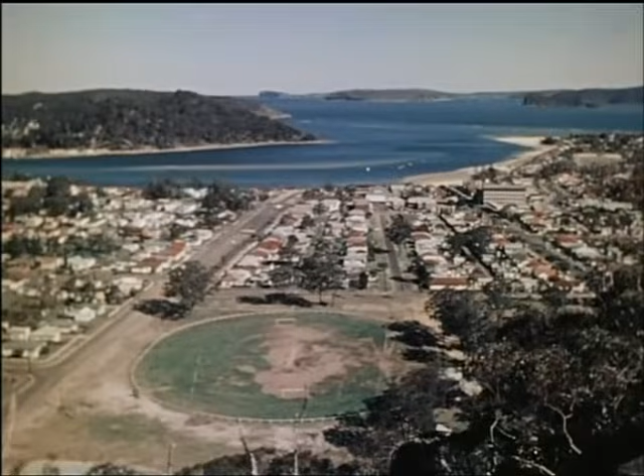With the increasing development of this part of the central coast of New South Wales, a bridge was required to provide a link between the relatively isolated eastern side of Brisbane Water and the rail and road facilities of the western side. The site selected is known as the Rip, where the waters narrow to a channel about 200 meters wide. The narrowness of the channel creates high flows of water with the movement of the tides.

Because of these rapid currents, the construction of the bridge foundations in the form of piers in the channel was undesirable. It was decided to construct an arch-shaped bridge of very high-strength pre-stressed concrete, cantilevered across the channel to avoid the need for permanent piers or temporary supports in the strong tidal flow.

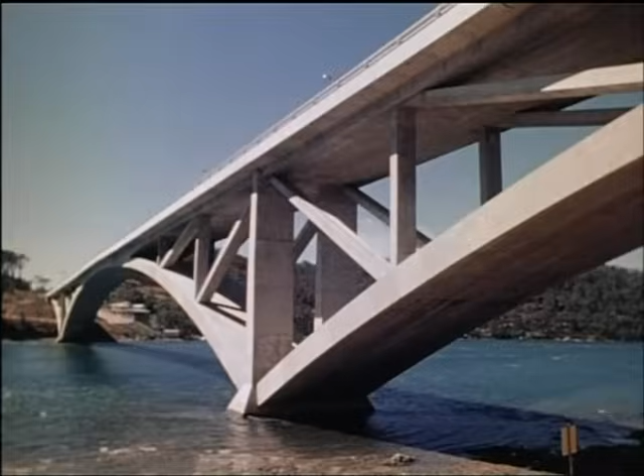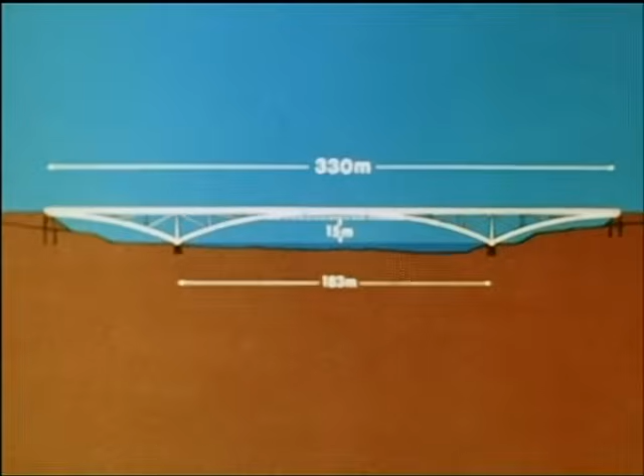The bridge comprises 2 cantilever trusses, each 147 meters long, and a central suspended span 36 meters long. The overall length of the bridge is 330 meters, with a main span of 183 meters and a vertical navigational clearance of 15 meters over a width of 70 meters. Each cantilever truss is supported on a pier, which is founded on bored piles in shallow water close to the shore and anchored to an abutment, which is also founded on bored piles.

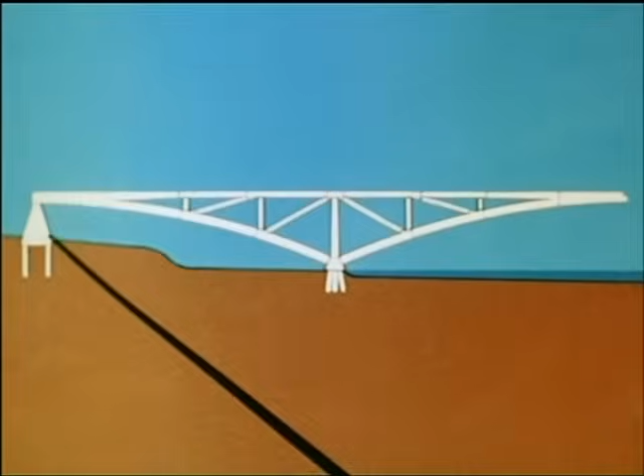A cantilever truss comprises 8 panels and many members, mostly precast and pre-stressed. In the 2nd to 7th panels, the bottom chord or arch rib and the top chord or deck are separated by columns and diagonal ties. The 1st and 8th panels are constructed of pre-stressed concrete girders of variable depth.

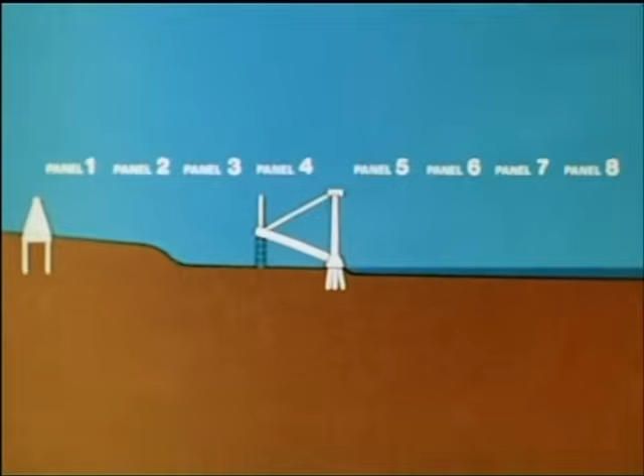With the abutment and pier complete, construction of a cantilever truss was commenced with the erection of the arch rib members of panel 4, one end being supported on a falsework tower. The first diagonal ties were constructed and 2 precast columns were erected. The panel was completed with the erection of the deck members, placing in situ concrete and pre-stressing. Similarly, panel 3 was constructed.

Cantilever construction of panel 5 over the water followed, and pre-stress was applied. The weight of the overhanging panel was balanced by the panels previously constructed on the shore. Construction continued progressively, the shore span being always in advance of the span over the water, so that there was always enough weight in the shore span to more than balance the weight of the construction being cantilevered over the water. The shore span was anchored at the abutment, the temporary supports were removed, and the addition of panel 8 completed the construction of the cantilever truss.

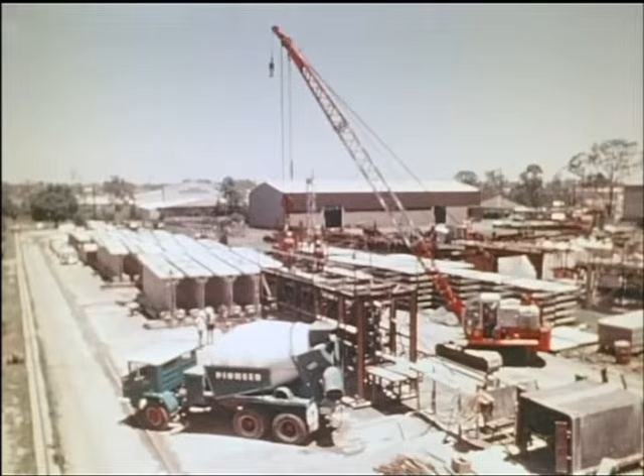In September 1971, a contract for construction was awarded to John Holland Constructions Proprietary Limited. The many precast members for the bridge were manufactured at their casting yard in Seven Hills and at the EPM factory in Blacktown. Each of the precast members incorporated bearings, stressing anchorages and ducts. The largest of these were for the arch ribs and weighed over 50 tons.

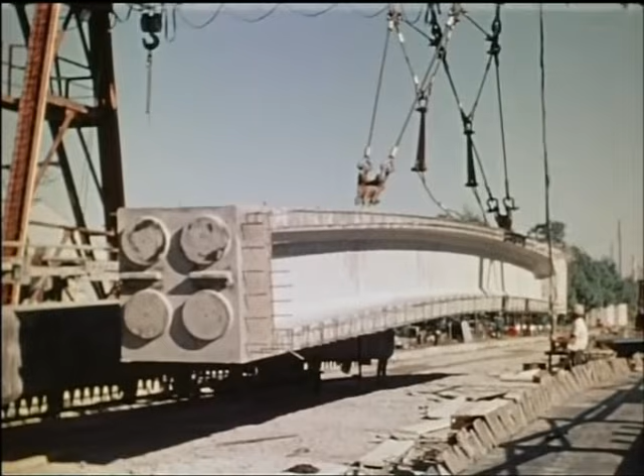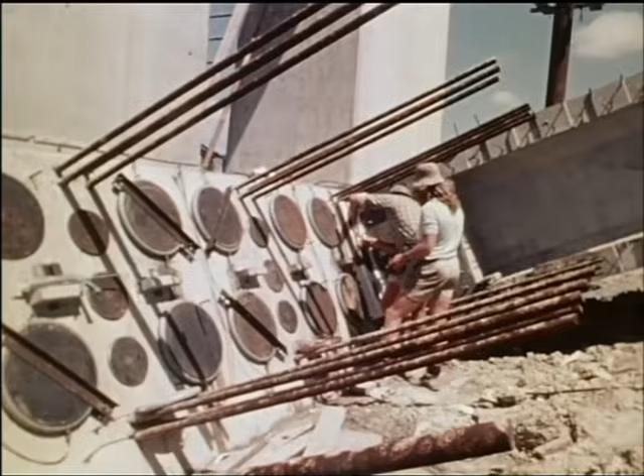At the bridge site, the main pier was constructed. The base of the pier incorporated temporary bearings and a battery of Freyssinet flat jacks to support the lower end of the arch rib members. The flat jacks were partially inflated with oil and together with the temporary bearings would provide hinges for rotation of the arch rib members during construction.

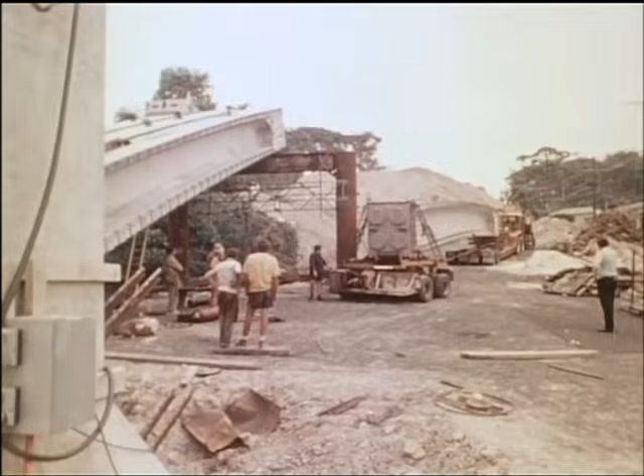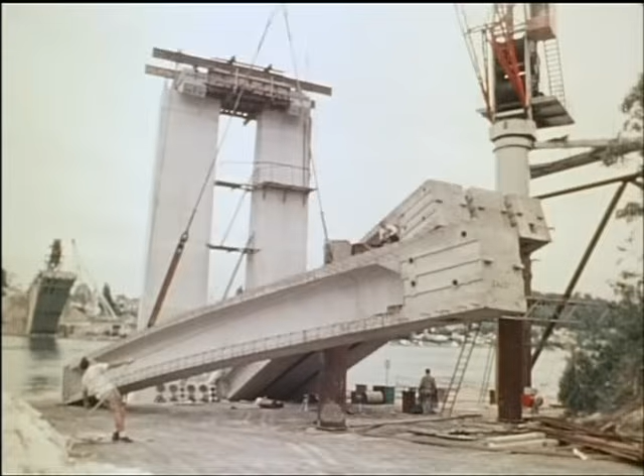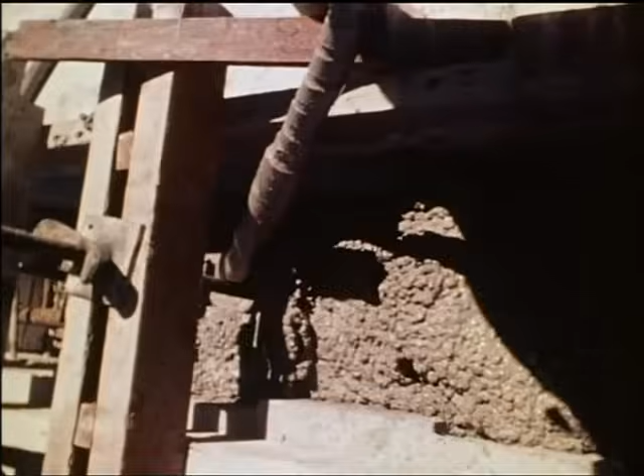The arch rib members were transported by road to the bridge site. A powerful crane positioned each arch rib member with its lower end bearing on the base of the pier. The upper end of each member was supported on a falsework tower. Concrete was cast between the ends of the 5 precast members, joining them together to form a cross girder. High tensile steel cable was inserted in the ducts and pre-stress was applied.

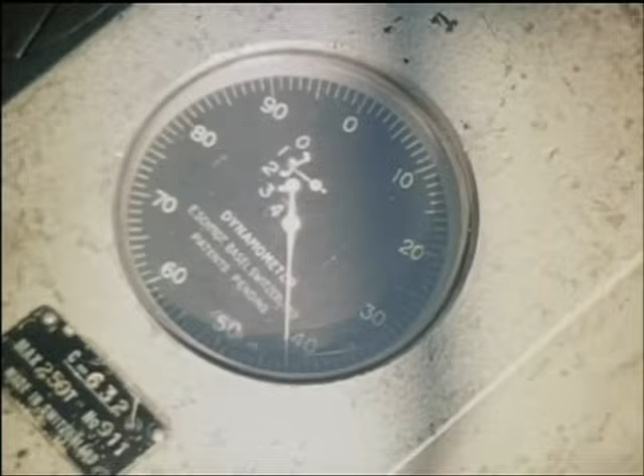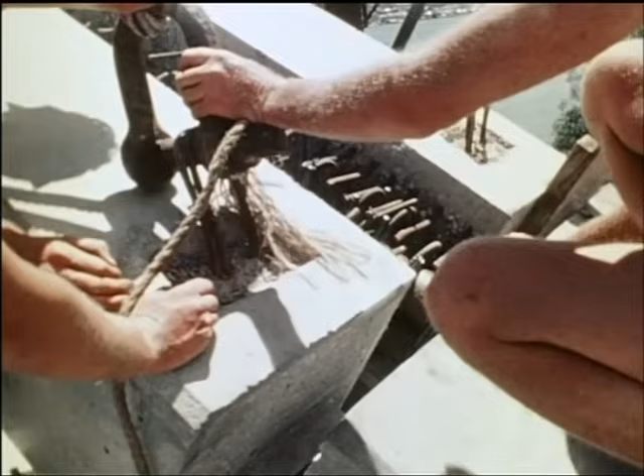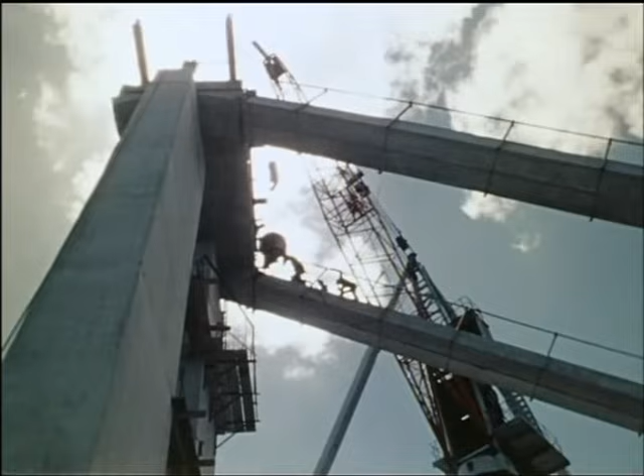Two diagonal ties were then erected. Each tie member was cast in 2 halves, each of which was supported on erection bearings. Pre-stressing ducts were installed between the 2 halves. Cables were inserted, concrete poured, and pre-stress was applied. The end of the arch rib was now effectively tied to the top of the main pier. Concrete was placed between the flanges of the arch rib members, so combining them into a single cellular rib.

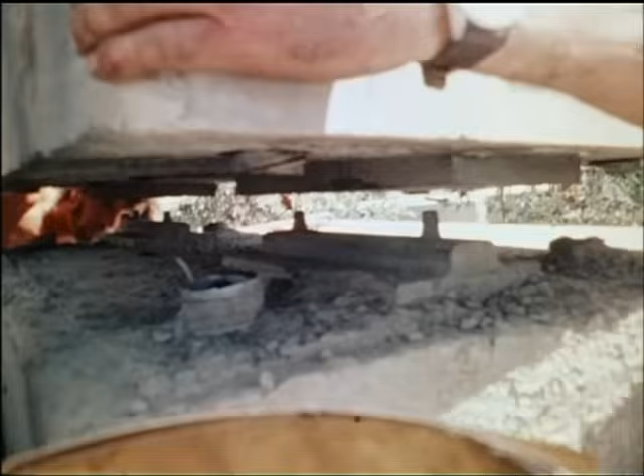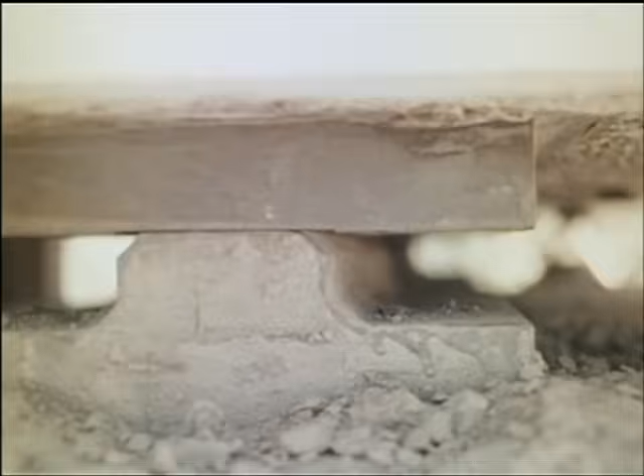2 precast columns were erected and temporarily supported by strutting from the ties. The columns, like the arch ribs, were seated on temporary bearings. All temporary bearings were left unconcreted to permit hinge action during construction. The erection of pre-stressed concrete deck beams followed. These incorporated longitudinal ducts in which cables would be inserted to progressively pre-stress the whole deck. The deck beams, like the other members, were seated on temporary bearings.

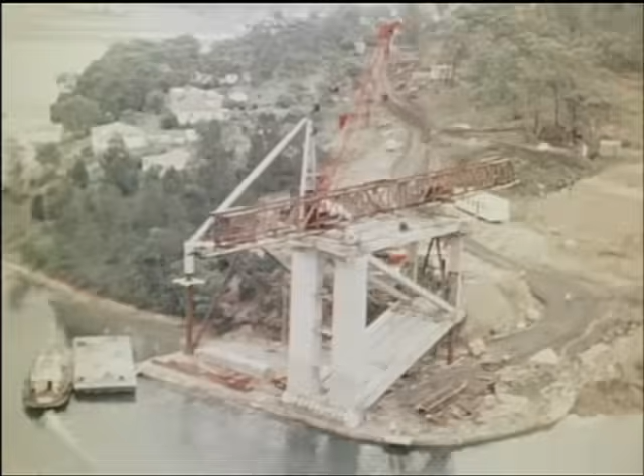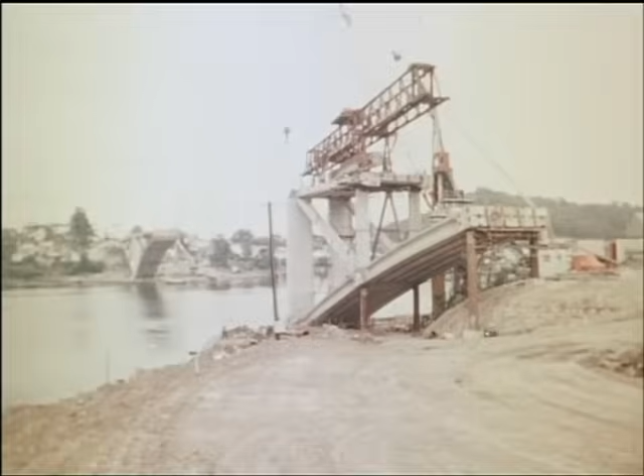5 deck beams were erected in this way. After placing of in situ concrete and pre-stressing transversely, longitudinal stressing tied the completed deck back to the pier headstock. A specially designed erection truss was mounted on top of the completed panel. Construction of the adjoining panels then proceeded. The erection truss now played the major role in handling and positioning the heavy precast members.

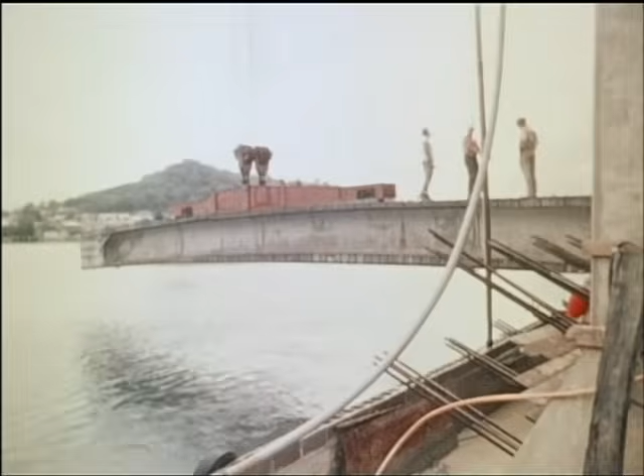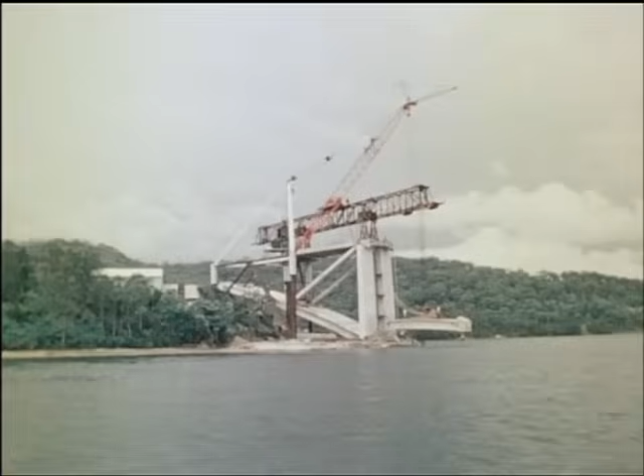Cantilever construction over the water commenced with the erection of the arch rib members of panel 5. Pre-stressing cables for the diagonal tie were anchored to the outer end of the arch rib member. The shore end was supported on the temporary bearing and flat jacks at the base of the pier. The outer end was supported by the pre-stressing cables from the pier headstock.

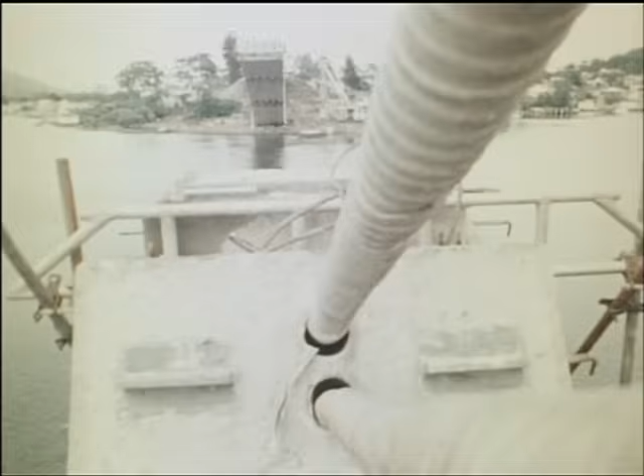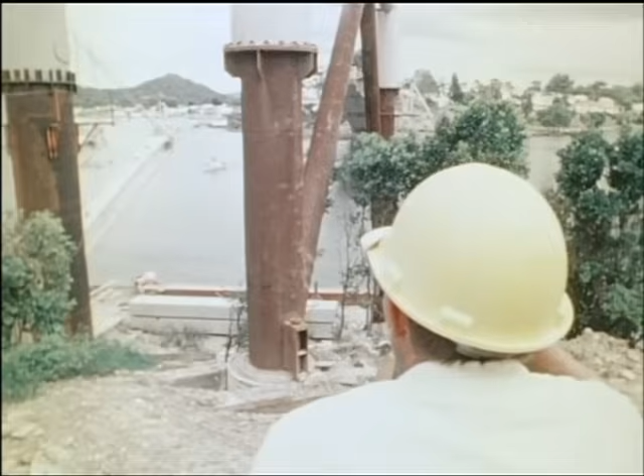The calculated deflection behavior of the cantilever truss during the course of construction was allowed for in the determining of all temporary erection levels. The external arch rib members were fitted with a temporary headstock. This temporary headstock supported the outer end of the remaining arch rib members.

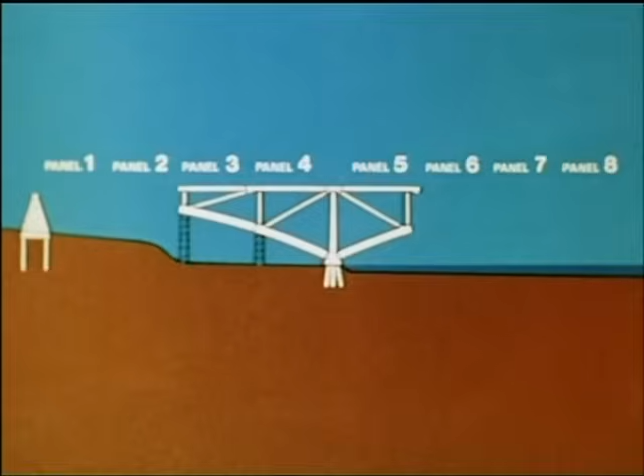Construction of panel 5 continued and was more than balanced by the completion of panel 3. A further stage of pre-stressing through the deck tied the completed panels together. As construction of the cantilever truss progressed, additional stages of pre-stressing the deck were required to counteract the increasing loads on either end.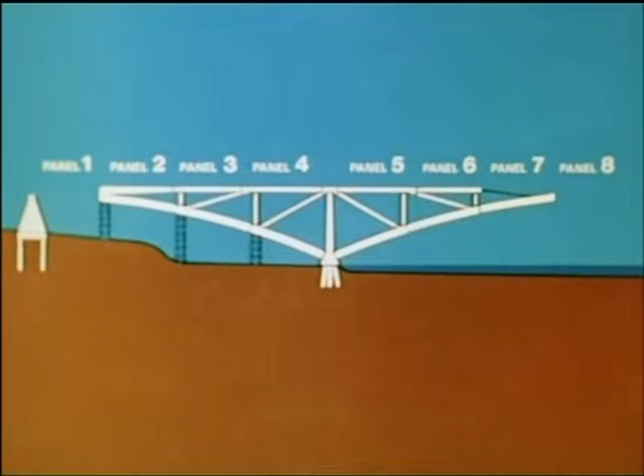In panel 7, the arch rib members were suspended individually by temporary cables positioned to allow for the casting of a massive cross girder extending upwards to deck level. This cross girder and an identical cross girder in panel 2 served as anchor blocks for longitudinal pre-stressing and also tied the arch rib and deck together.

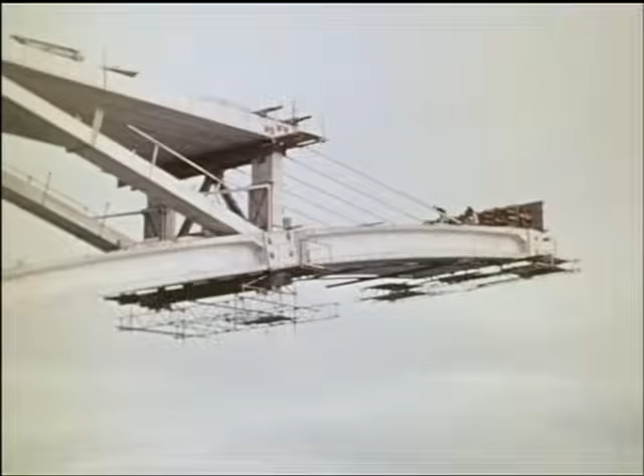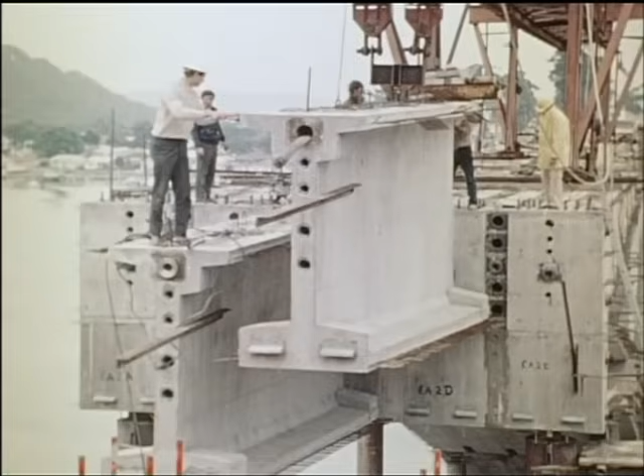Meanwhile, the truss was positioning the precast girder segments for panel 1. The first segments projected halfway between panel 2 and the abutment and were seated on erection bearings at their bases. An upper cable was used to hold each segment in position against the anchor block in the end of panel 2.

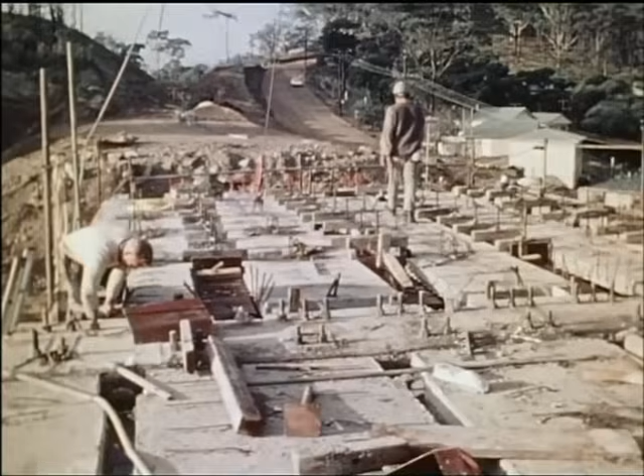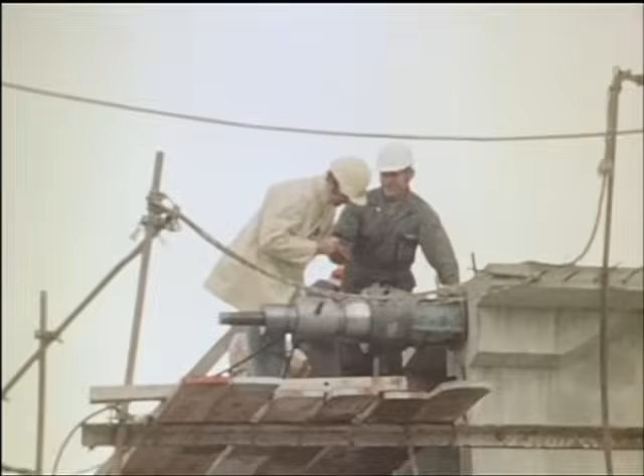With the segments for the first part of panel 1 in place, formwork was erected for the joints between the flanges and the transverse joint with panel 2. After concreting, this part of panel 1 was pre-stressed. The newly constructed cross girder at the end of panel 7 was pre-stressed transversely with cables. It was also stressed vertically with high tensile steel bars, thus providing anchorage to the arch rib.

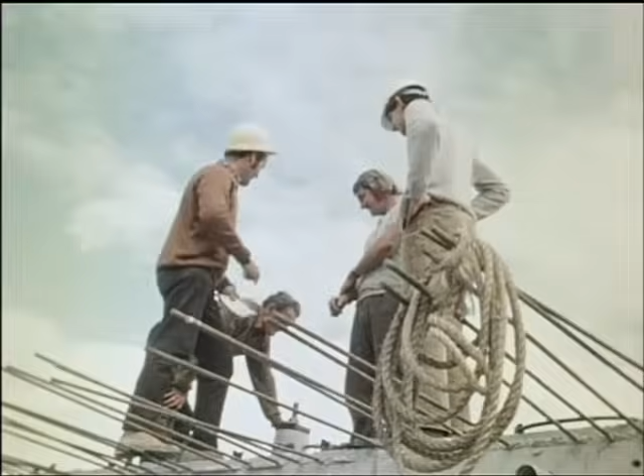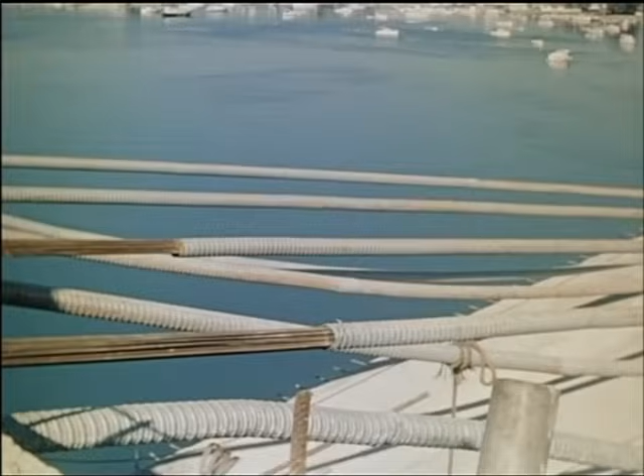The cross girder was then ready to provide anchorage for the cables which would permanently support the panel 7 arch rib. The 5 temporary cables supporting the arch rib were augmented by 4 cables anchored to the top section of the cross girder. These were stressed to share the load with the 5 temporary cables.

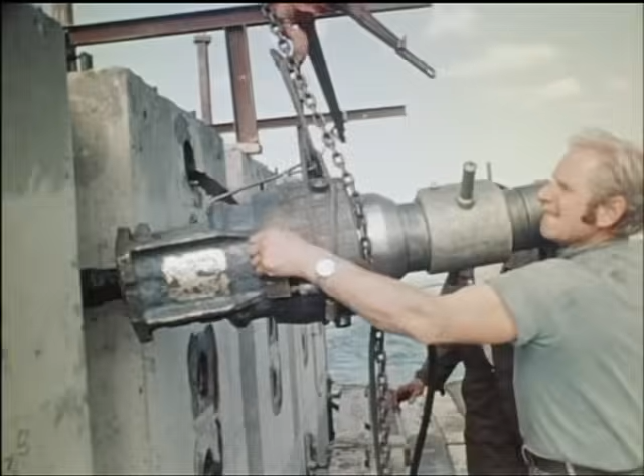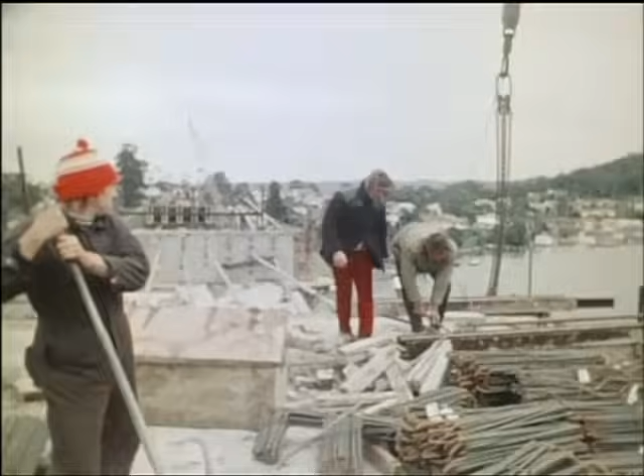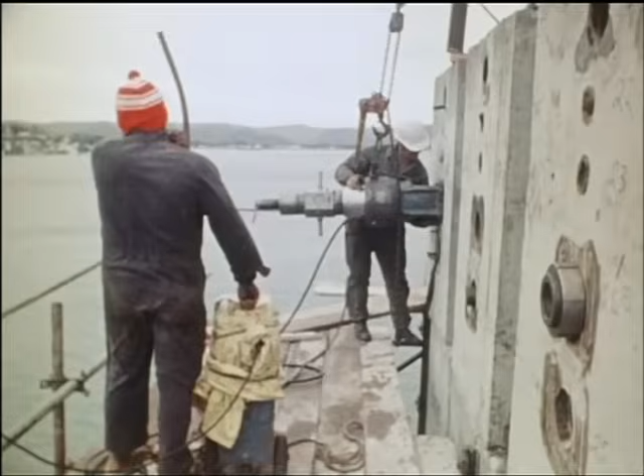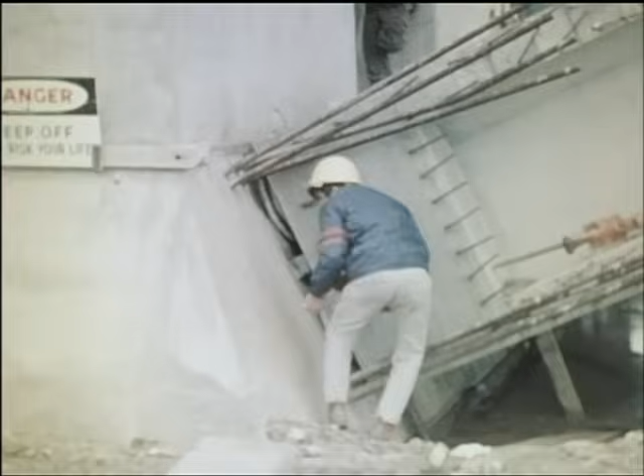The deck levels were checked at key points along the cantilever truss. Observed discrepancies between actual and predicted levels were then corrected. This was achieved by the operation of the flat jacks in the open temporary joints at the pier base and at the ends of the arch rib members. At each joint, in turn, the flat jacks were connected in 2 hydraulic circuits. Oil was pumped in to inflate the jacks and open the joint.

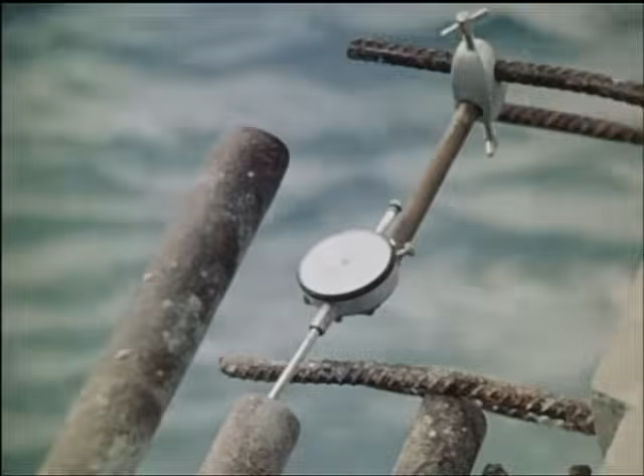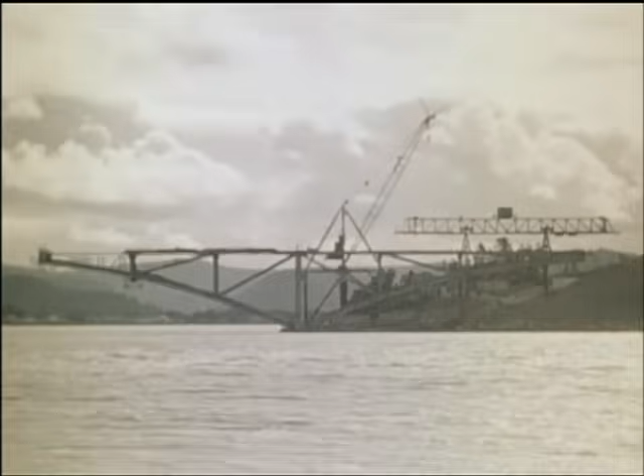Correction to the shape of the whole structure was made possible by the hinge action of these joints and the other temporary joints in the deck and columns. This operation had the effect of raising the cantilever so that each key point was brought to the desired level. Subsequent deflection behavior of the cantilever truss was sufficiently predictable for the temporary hinge joints in the arch and deck to be fixed. Oil in the jacks was progressively displaced by grout and the joints concreted.

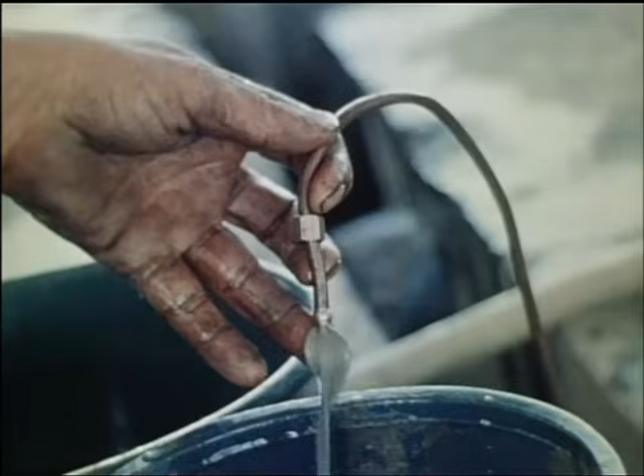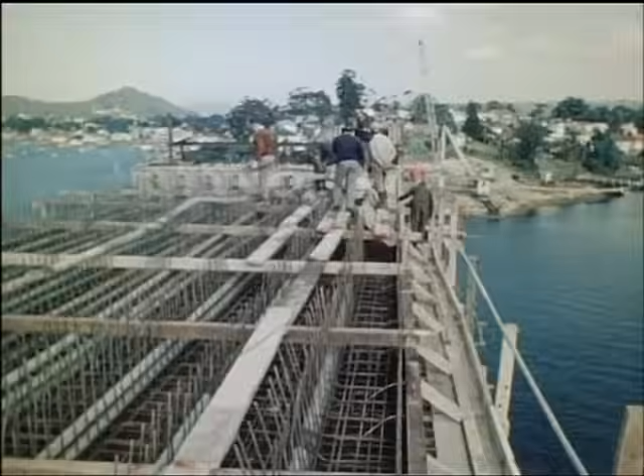Panel 1 was then completed by the erection of the remaining segments. These segments reached to the abutment, and after aligning, joints were concreted and the whole panel was pre-stressed back to the cross girder in panel 2. In panel 7, the deck was concreted in situ. The bottom slab was constructed first, and the ribs and top slab were formed using polystyrene void forms. Concrete was pumped from the shore.

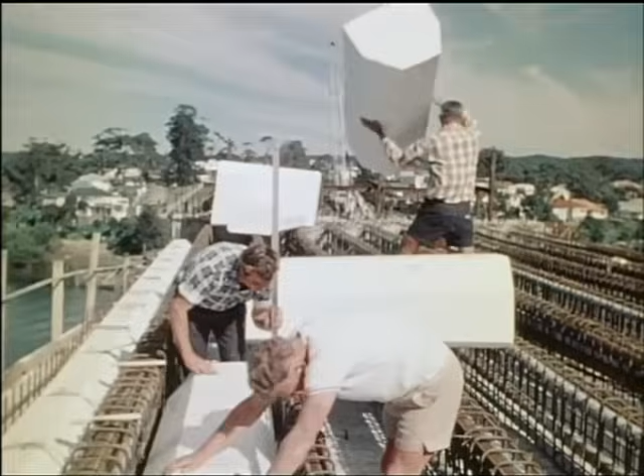Additional cables were threaded through the length of the deck from panel 1 to panel 7 and stressed. Also, the cantilever truss was anchored at the falsework towers near the abutment. Free cantilever construction of panel 8 could then proceed with safety. This was attached in 2 parts in a manner similar to the construction of panel 1.

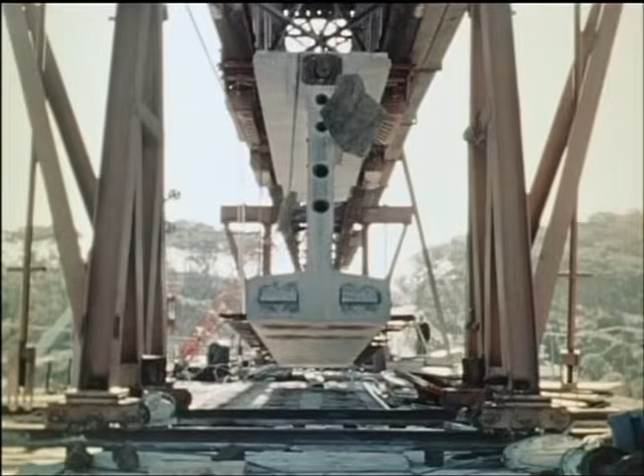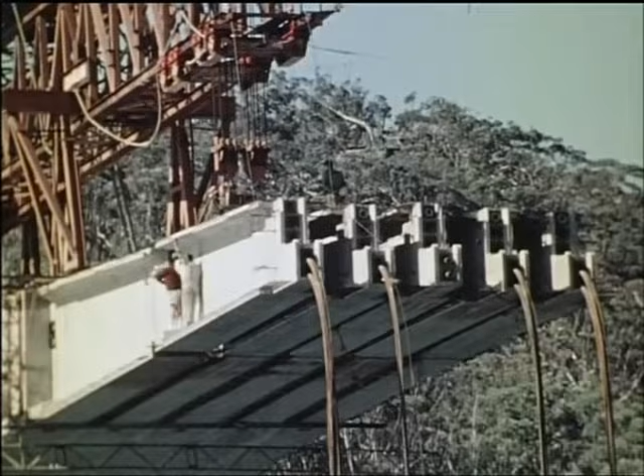With the completion of panel 8, the stage was approaching when this cantilever truss would be linked with the one constructed on the other shore by the insertion of the suspended span. Preceding this final major operation, fascia panels would attach to the arch rib. Cantilever panels were added and incorporated in the deck by the placement of concrete.

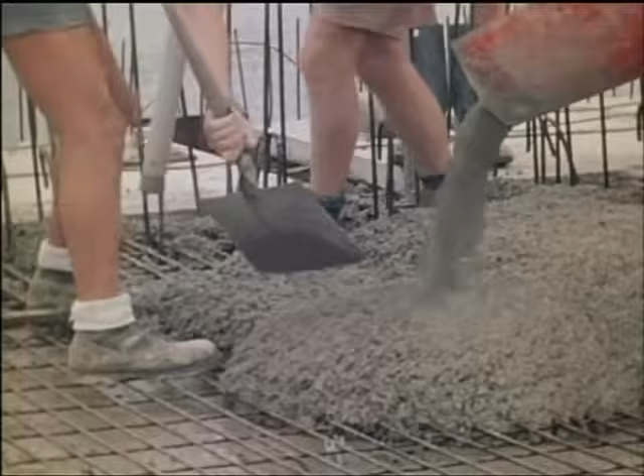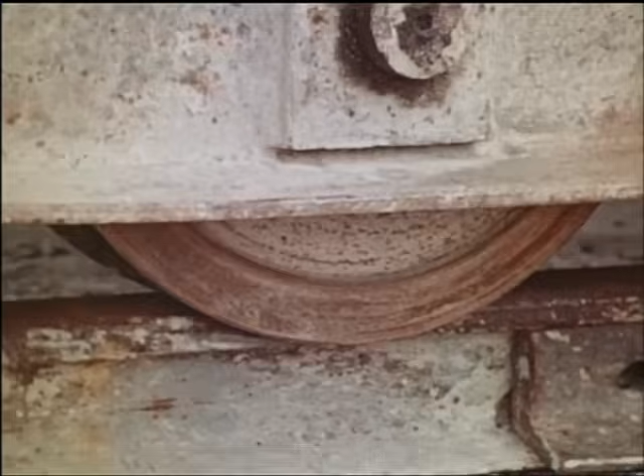Meanwhile, the erection truss was launched to bridge the remaining gap in preparation for the erection of the suspended span. For the launching operation, it was necessary to counterweight the partially dismantled truss and to provide a needle beam to receive it on the far side.

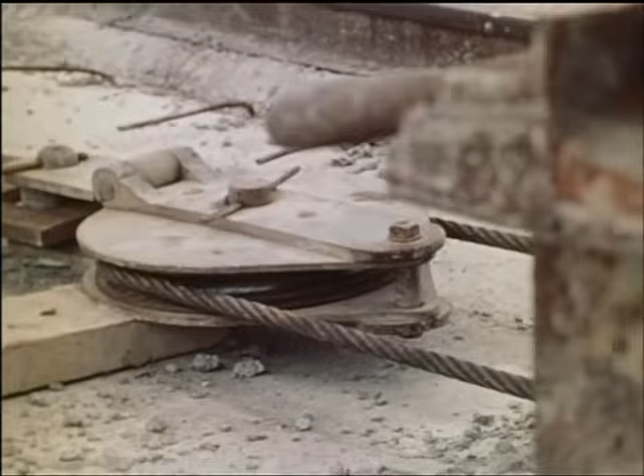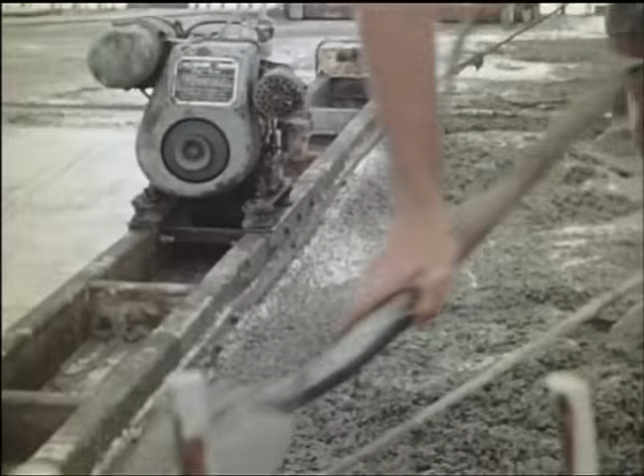Deck concreting was then completed through to panel 8. A further stage of pre-stressing was required to prepare for the placing of the suspended span girders. This stage of pre-stressing required cables approximately 150 meters long. All cables used in the bridge were manufactured on the site.

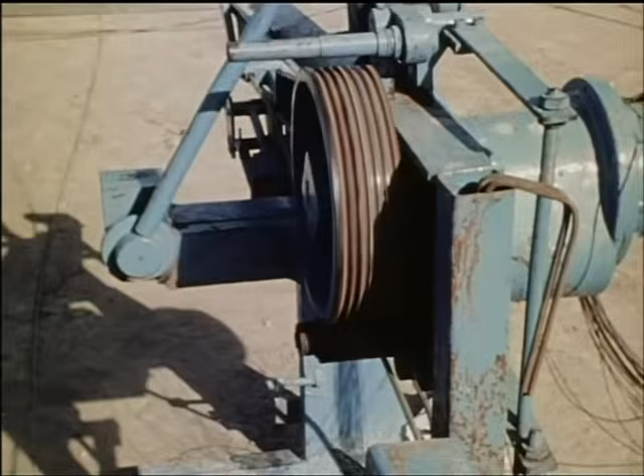The BBR system was used, and cables were made up of 55 7mm diameter high-tensile steel wires. This system requires the wires to be cut accurately to length and button heads formed on the ends. With such long cables, stressed to over 250 tons from both ends, the extension was as much as 600 millimeters.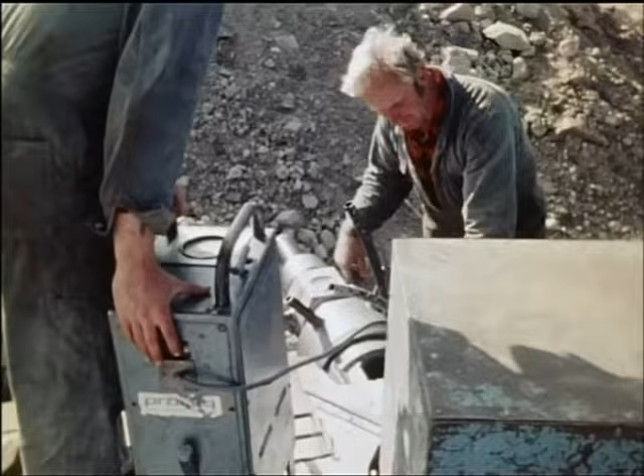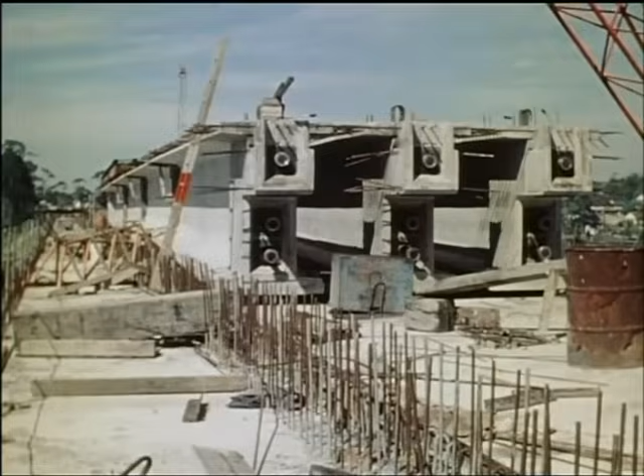Because of their length, each of the girders for the suspended span was assembled from 4 precast segments. Each set of segments was aligned to a predetermined camber and the joints concreted. Pre-stress was applied to complete the girder.

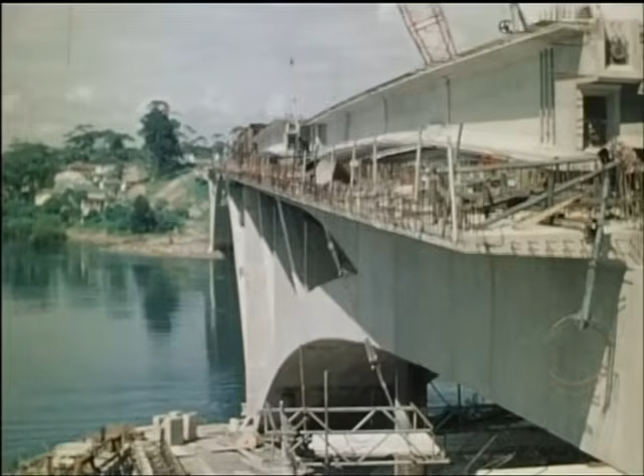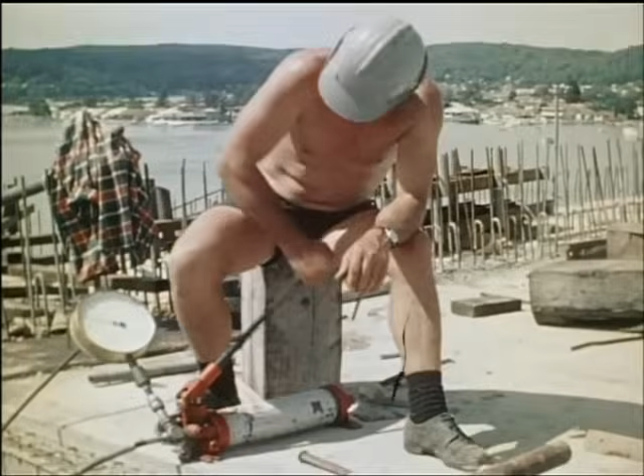Before the girders were launched, roller bearings were installed at the end of panel 1, and each shore span was anchored permanently to the abutment by means of precast holding down beams and vertical high-tensile steel bars which were pre-stressed. The girders for the suspended span could then be launched.

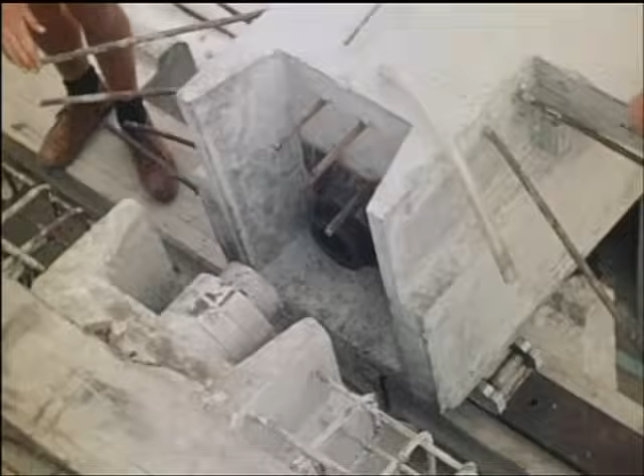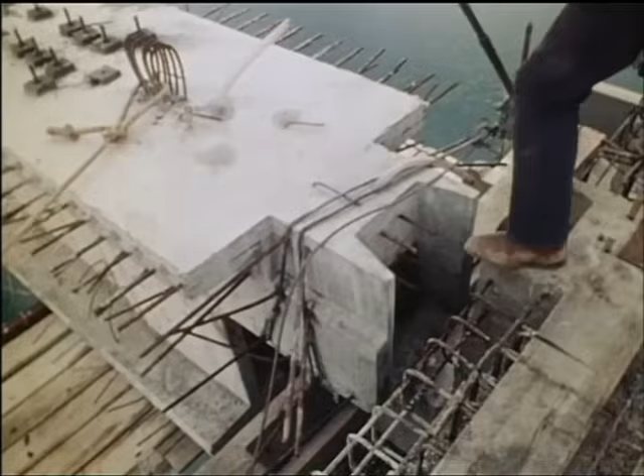When disconnected from the launching truss, each girder was finally positioned by winching sideways on supporting skates. The eastern end of each suspended span girder was supported on a fixed bearing. The western end of each girder was supported on a stainless steel roller bearing. These bearings, together with those of the abutments, provided for the predicted longitudinal movement of the bridge.

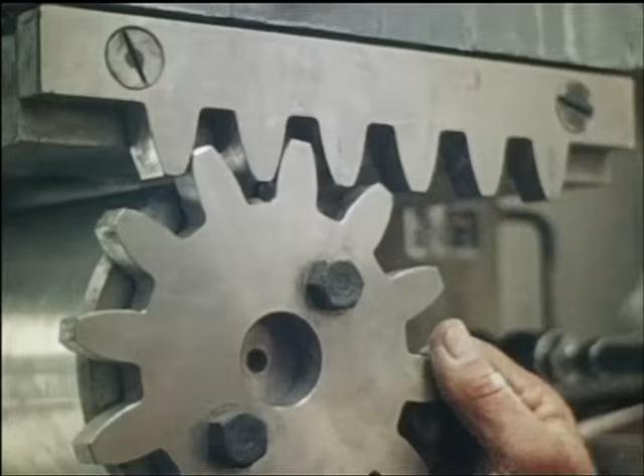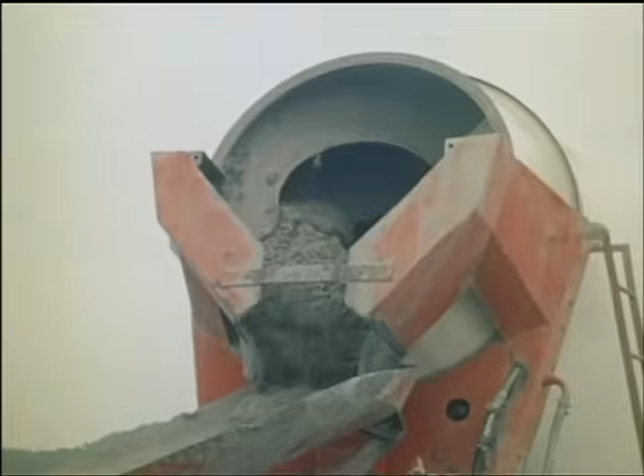Following the final stage of pre-stressing the deck of the cantilever trusses, the deck of the suspended span was concreted. The lightweight, high-strength concrete used in the deck and girders of the suspended span reduced the weight of the suspended span by 20% compared with the weight of the normal high-strength concrete in the cantilever trusses.

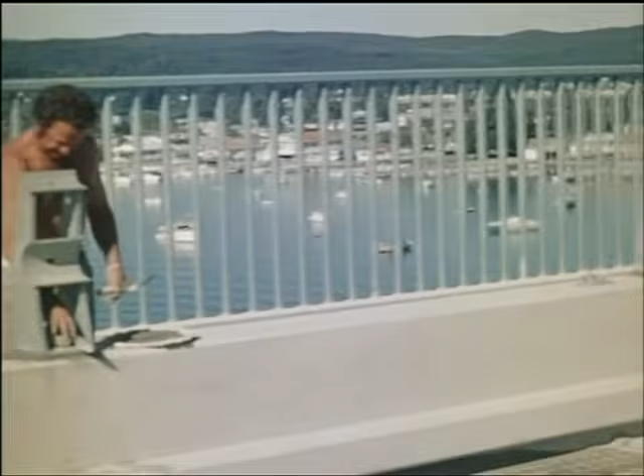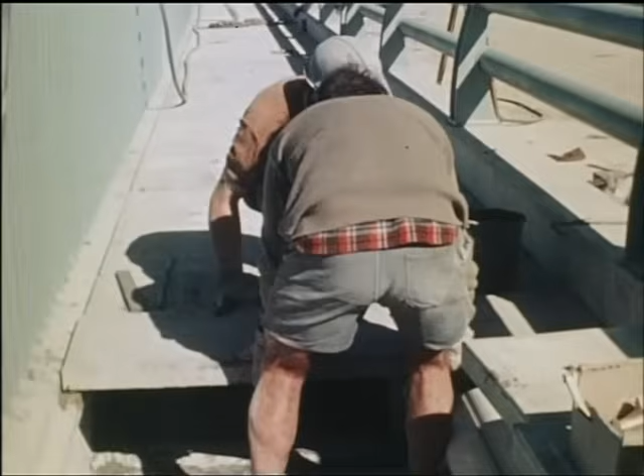After concreting the temporary joints, the columns were pre-stressed and false work removed. Crash barriers were constructed on the deck, handrails and crash rails were erected. Precast slabs were laid for the footway, covering a services duct in the space below. Lamp standards were erected, and spray painting of the railings completed the contract work.

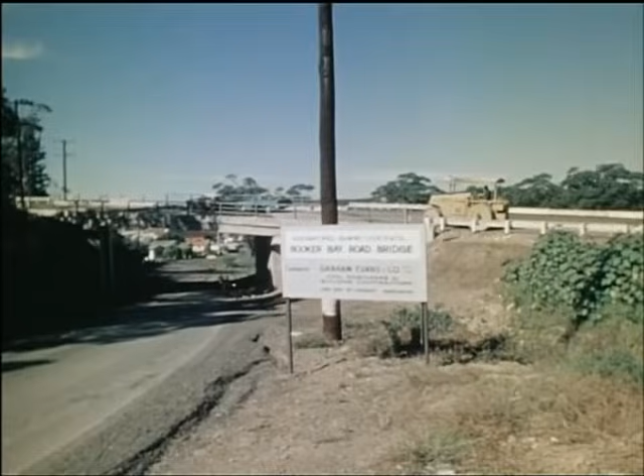Two kilometres of approach road, including a bridge over a local road, were constructed by the Gosford Shire Council. Finally, an asphaltic concrete surface 60 millimetres thick was laid on the bridge by the department's own labour and equipment.

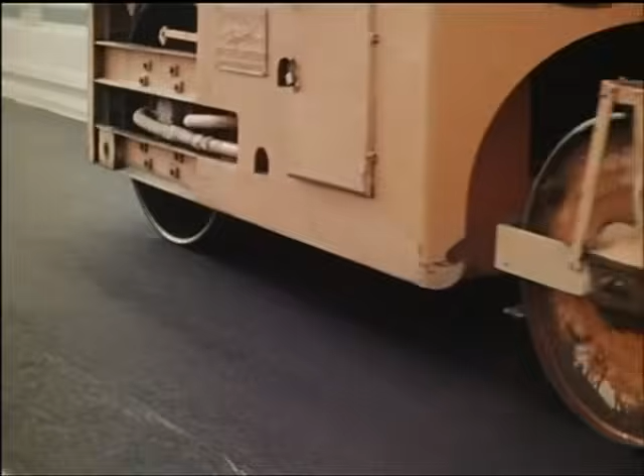On Friday, the 14th of June, 1974, the bridge was opened with a ceremony at the western abutment. Many local residents were among the large gathering of guests addressed by the Commissioner for Main Roads, Mr. R.J.S. Thomas. And today, the younger people of this generation, I think, are witnessing the opening of a bridge which is a milestone in New South Wales, a milestone in technology, and a milestone in beauty.

And I'm sure that you will go away from this ceremony very much enriched by the message which the acting Premier, Sir Charles Cutler, who is our Minister, will bring to you this morning. And ladies and gentlemen, I have much pleasure in asking Sir Charles to address you. Sir Charles Cutler, acting Premier of New South Wales and Minister for Highways, addressed the assembled guests. Sir Charles complimented the department on the roads and bridges it was producing for New South Wales.

So although I don't dedicate this particular bridge, I could very well dedicate bridges such as this and the beautiful roads that are being built by them to the men and the women of the Department of Main Roads who do a tremendous job for this state and for Australia. I pay tribute to them, and I have very much pleasure in declaring this bridge officially open.